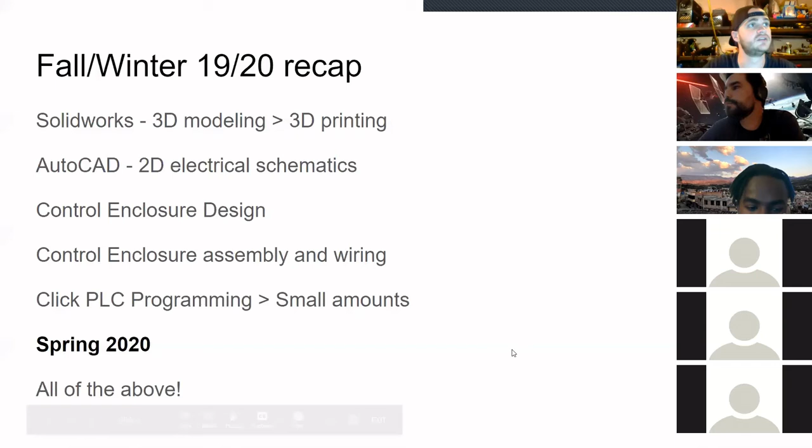So this quarter, what I want to do is go back over some of the things we already covered because we have a lot of new people joining us and there seemed to be a lot of interest in the SolidWorks and AutoCAD even more than the programming side.

So I'll share here the results of the survey. This is a homework assignment on Canvas. So 17 of you guys got to that. That means there's like 5 people who haven't done this yet. So if you're here and you haven't done this yet, please go complete the survey.

But it looks like about half of you are planning to put in as much time as our meetings will take for this quarter, which is fine because we're going to do some collaborative work. I do encourage you to play around with the things we're going to cover on your own time and really try to apply what we go over, explore any things you were unsure about, send me emails. This is going to be a lot more valuable if you put in a little bit of time on your own rather than just coming to these meetings.

Like I said, there was a lot of interest in AutoCAD, so we'll definitely spend some time on that. Almost as much interest in SolidWorks, so that'll be good. Unfortunately, we don't really have access to 3D printers this quarter, unless they change something that I'm not aware of. I don't think that's going to be available until the quarantine is lifted. But we can still go over how to set up 3D prints so that whenever you do get back on campus, you can go print up all the stuff in your library that we create this quarter.

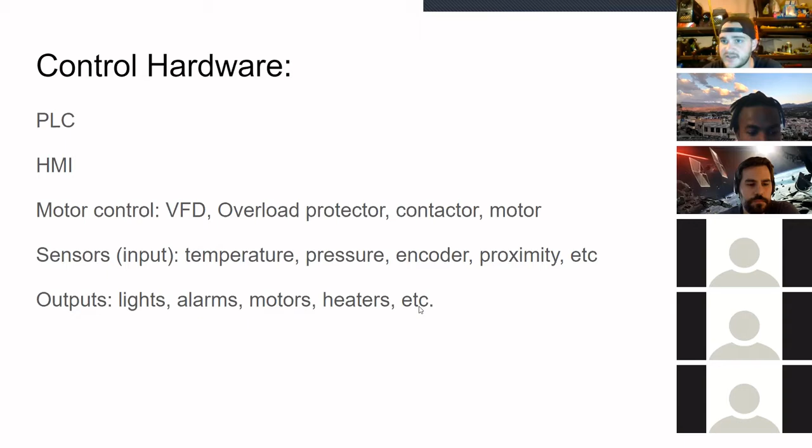You're going to have a bunch of motor control components. You'll have a bunch of sensors that are inputs to the control system, and then you'll have outputs in the forms of lights, alarms, motors, heaters, etc. So we have the first three available to us. I'm not going to hook up a heater in my house because I don't want my landlord to kick me out.

So just an example of what I'm talking about. If you have your air conditioner in your house, you may or may not know how this works, but we're just going to go through it real quick. Your home AC is broken up into different modules. You have your control head, which is the thermostat.

Sorry, we got a lagger here. Hey, Cody.

So you have your controller, you have a user interface, you have sensors, you have a heater, a cooler, and a blower unit. And so in this particular system, the human interface and the controller are one module, right? That's your thermostat. That's where you go and punch in your temperature, and whether you want it to cool or heat and what times you want it to run.

And then you have really one input. When you're talking about an input, you're talking about a sensor input to the controller that is monitoring continuously, right? Not human input. So the one real input we have on most AC systems is a temperature sensor that's installed somewhere in your house. Usually it's actually just on the thermostat, and that's just looking at the temperature of the room. Once that goes below or above a certain threshold, your AC automatically turns on and it kicks on the cooler or heater and the fan.

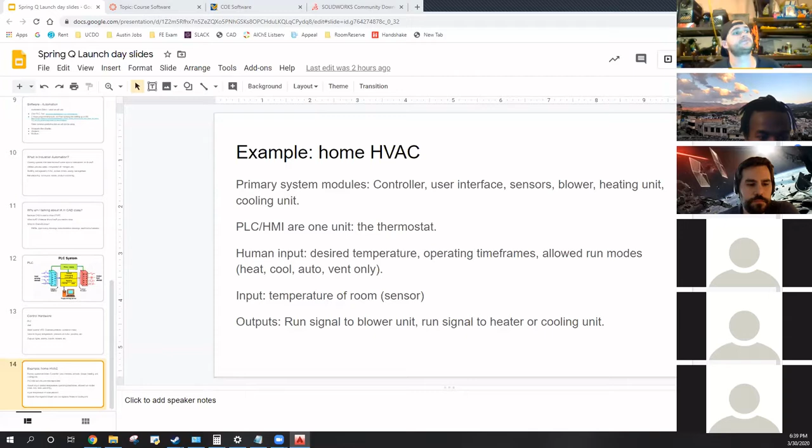Bear with me. By the way, if you are going to install a local copy of AutoCAD, I think the oldest version you can get through that link I have is 2018. If you want to put in some legwork and try to find 2016, 2016 doesn't watermark your drawings with a student watermark, which anything after 2017, when you save the drawing, it's electronically stamped with a student watermark, and you can't remove that ever. So it might behoove you to get a 2016 version if you can.

Does everybody have AutoCAD pulled up? Let me know if you don't. Yep. It's asking for a license.

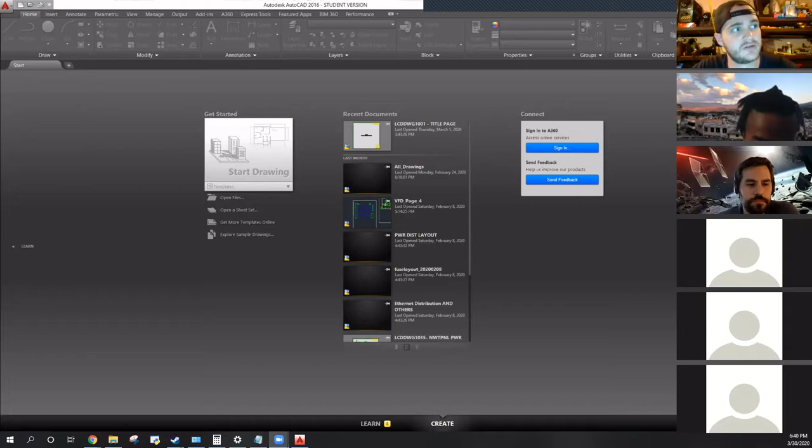Okay, are you remote or local? Local. Okay. Did you just install that today? Yeah. Okay. You should have got an email with the license, but you might want to just go remote for the sake of expediency.

Okay, I'm gonna go ahead and move forward. I'm gonna assume everybody has it fired up. Let me know if you don't and you want me to wait.

So the first thing you do is go in here and hit in the upper left corner, hit the new button, and it'll pop up this to select a template. Just use the default acad.dwt.

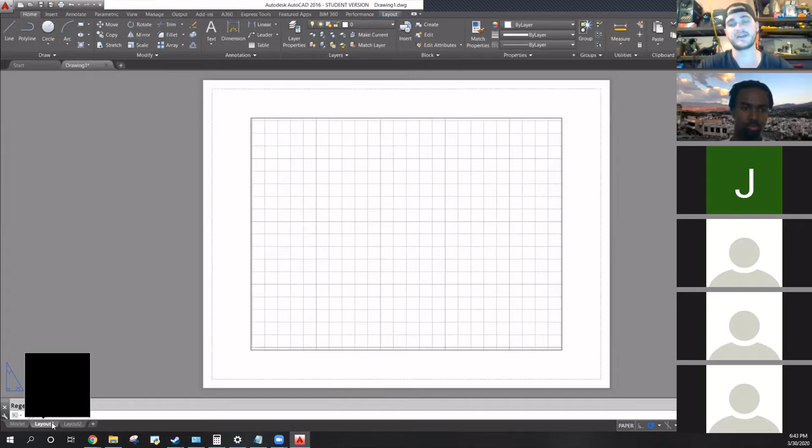Now, there's a couple of layouts here. By default, when you open it up, it'll have like layout 1, layout 2. These are like windows into your model space, right? And you can define these however you want. What it's going to show is a certain slice of content that you tell it to in the model space, so it's not necessarily going to display everything you've drawn in model space. So I'll just give you a quick demonstration of that.

I drew a big circle, but that's not shown in my layout space. So what I did is I reframed my model space to show that circle fully. Now I can zoom this in and out, so I can show more than that circle, or I can show just a small chunk of it.

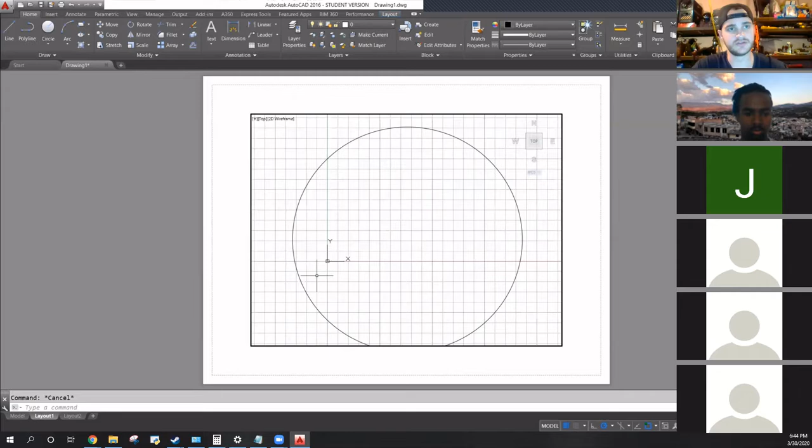So just be aware of that. Whenever you print a drawing to PDF, you're going to do it from this layout space. As we get further into this, you'll see it becomes very important how you define this stuff, how you zoom it, in order to get it to export correctly. For now, we're just going to draw stuff. Don't worry about that, but be aware that you need to always be in model space when you're drawing.

Okay, so some basic commands. When AutoCAD was first created many, many moons ago, pretty much everything was text-based. You would type in the coordinates of where things went, and there was basically no point and click. Over time, it's really evolved to let you use your mouse a lot more and click around and do stuff. You can see there's line and polyline and circle and all this stuff up in the top left-hand corner that you can click on. But for the sake of working quickly in AutoCAD, it's good to memorize some basic commands.

This will come with time as you do more and more drawings. The first one is that to draw a line, all you have to do is hit L and then press enter. So I've now opened the line command, and now all I have to do is click where I want my line to start, drag it over, and click where I want my line to stop.

Now, one of the things about AutoCAD is usually, at least with lines, and I think with a lot of other shapes, it keeps creating them as you click through. You can see everywhere I click, it stops that line and starts another line. So whenever you want to stop drawing lines, just hit escape.

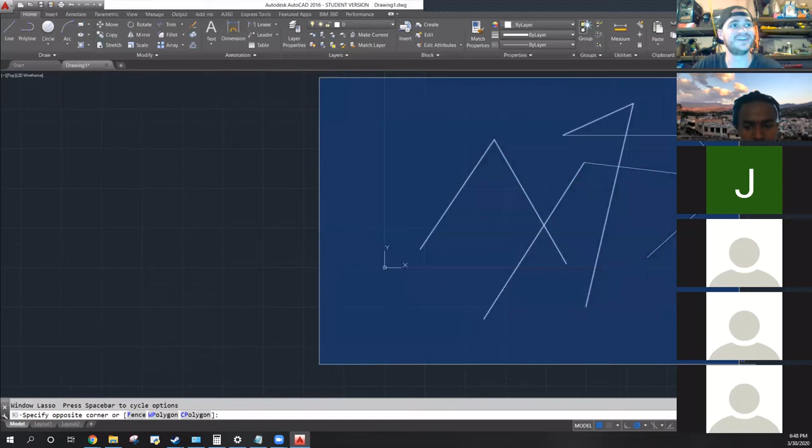I know I'm taking a lot of time on this one little thing, but one piece of feedback I got from previous quarters is that I rushed through things too fast. These are the fundamentals that will make your life good when drawing in AutoCAD, because it's a relatively simple software. But if you don't get these fundamentals down, your life's going to be tough—you'll know exactly what you want to do, feel like you're telling the software to do it, and it won't, which is super annoying. So I'm going to take the time to go through this step by step, slowly, and be super clear. If I'm boring you to death, sorry—we want to make sure we get this right the first time.

So that's lines. Now if you want to draw a box, go up here in the top left and do the same thing—just click and drag. Now if you notice, when I get into a certain geometry, it creates that slanted green line going across. That just means I'm making a square. AutoCAD does a lot of nice things like that for you automatically. So even though you're making a rectangle, you can also make a square if you just follow that green line and click. Okay, so that's a square.

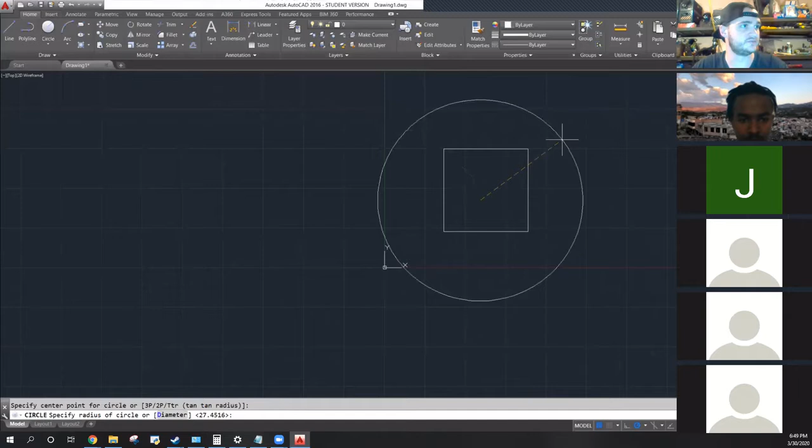Same thing for a circle. And then a polyline is basically just the same as drawing a bunch of lines, kind of—but instead of being separate lines, it's all one single line. That can be useful depending on what you're using it for. Generally speaking, I'd say just use the line tool and make multiple lines, because there are commands to group and ungroup those lines, which I think should work here, maybe.

Okay, I'm going to redo that real quick. So if you make a polyline with multiple line segments—okay, even though this has a bunch of different segments, AutoCAD is treating this as one entity. This is one piece of geometry in AutoCAD. Well, what if I want individual lines in this shape so I can manipulate those lines however I want?

There's a command called explode. What explode does is take any entity like this that has multiple pieces joined into one group, and separate them. So make a shape like that using polyline and then type explode, and you'll see now that these are actually separate entities. You can individually select them, drag them away, and manipulate them individually. Cool.

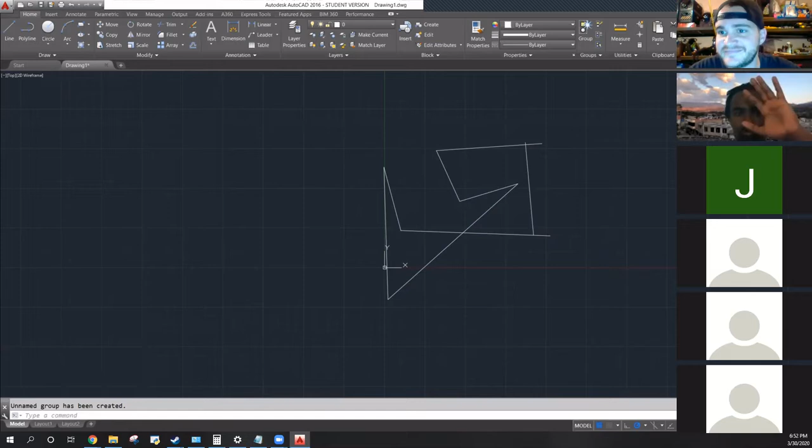Yeah, so I'm trying to explode a box that I created, but it says six objects cannot be exploded. Wondering if—let's try it, I'm gonna make a box. I think it was because I did individual lines to make the blocks. Oh yeah, okay, that's what I was about to go over.

So if I just have a line here, and I select this and try to explode it, that is its smallest entity—it can't be broken into individual pixels. A line is the most basic entity you can have in AutoCAD, so it's not going to let you explode that into smaller constituent items.

More so, I created a box with all the individual lines, then I grouped it, and I thought... Oh, it's the reverse of group, but it's not? It should be, so let's explore that. The next thing I was going to do is show you how to group it—so if you select all these things and type group... did I already do that?

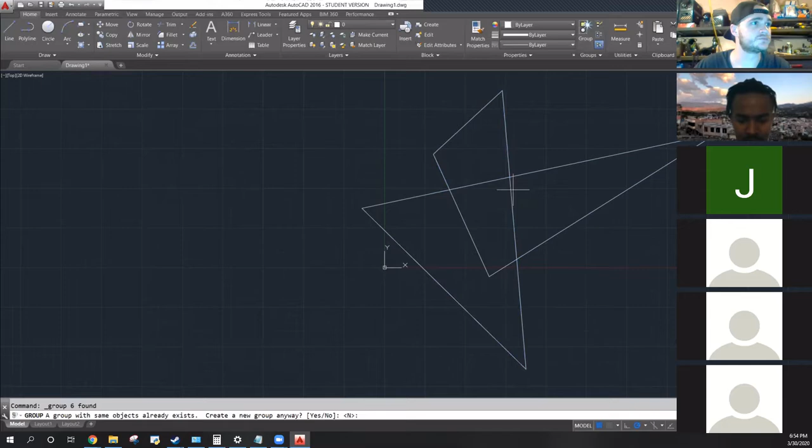Okay, well, I know another way to do this. So if you type in block, it'll come up with this block definition tool. A block is a special kind of object you can create, and this is really good if you're creating a hardware module or something that has a bunch of individual pieces.

You can draw them individually, and then when you create this block, you can name it whatever you want. I'm going to call it polygon. Create it. Now this is one individual item, right? Like it was before when we drew it.

But if you double click on it, you can edit that block specifically in the block editor tool. This is powerful because what you can do is, let's say you have a specific module like a power supply, right?

You create a block for that power supply and save that as a block. You can recreate that power supply by just copying that block in your drawing. Then let's say you made a mistake when drawing it, you can go in, edit that block, and it'll edit every single instance of that block in your drawing. It's kind of like a function block in programming, right? If you have a function that's being called in different software, you can go edit the original source function, and it'll then be changed for all the software that calls it.

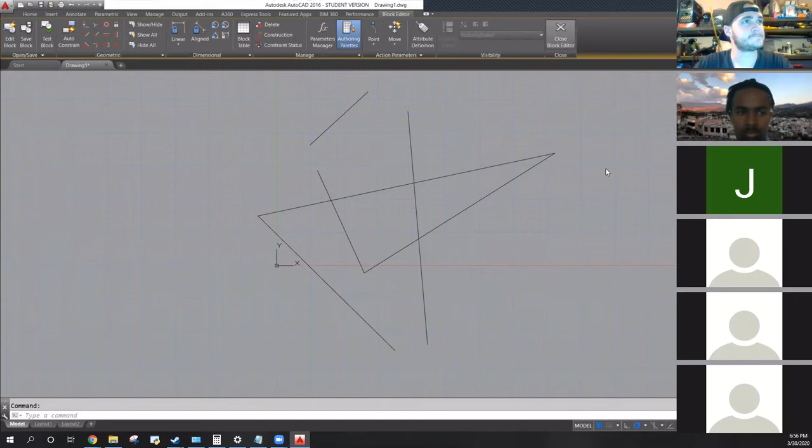So I'm going to save my changes, and now you can see in the main drawing it's all screwed up and it's not a very good polygon anymore. To be honest, I thought group worked that way, but apparently not, so I'm learning along with you guys. It's really weird because I swear I've grouped together a bunch of things before and had it stick together in one shape.

So you can explode a block in the same way you can explode a group, right? Don't worry about what I'm doing right now. Okay. Onward and upward.

So we went over blocks and groups and how to draw different shapes. Now I want to go over some of the more important settings for these drawings, which is down in the bottom right hand corner here.

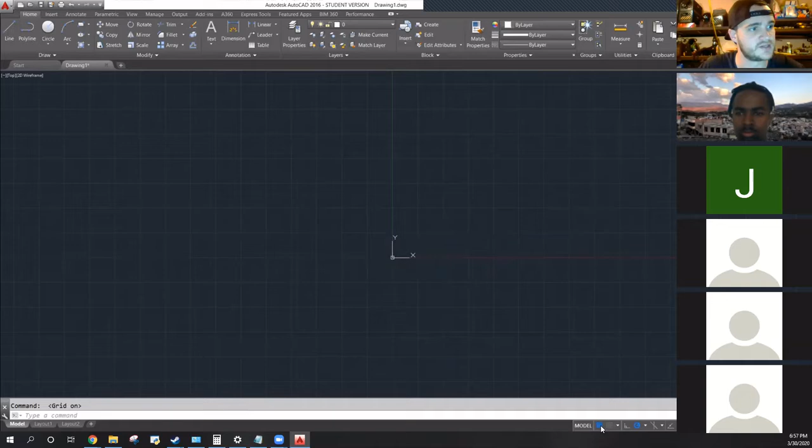The first thing here is displaying the grid. You always want to keep the grid on. It just helps give a sense of scale to your drawing. I guess if you really hate it you can turn it off, but I always use it.

There's another snap mode called grid snap. If you have this on when you draw things, if you look at how my cursor is being moved, it's snapping onto those grid lines and it'll only move to a point in that grid, to an individual node in that matrix. Some drawing standards or companies require you to keep grid snap on at all times.

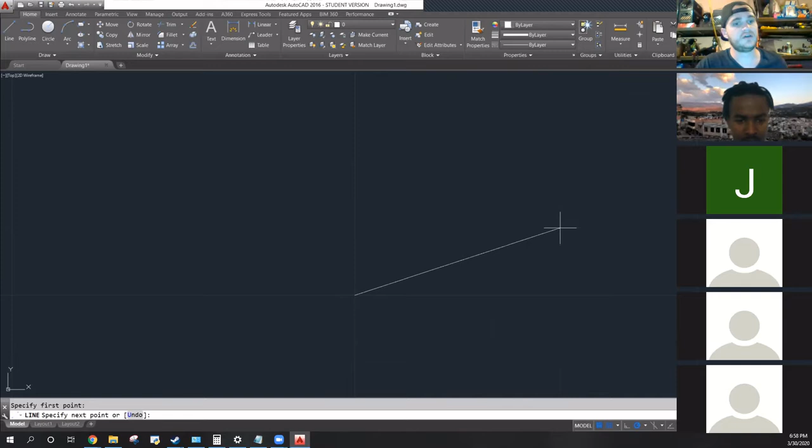There's advantages to that. It's super frustrating to work with sometimes if you're used to drawing without it, but it basically makes everything very square in the geometry. So I almost never use that unless there's a really good reason to, but it is there if you want it.

Zooming back out, restricting cursor orthogonality just means if you have this on, you can only go at 90-degree angles. So if you draw a line, you can literally only go north, south, east, west. You can't go on any other angles, right? Super annoying, I usually leave that off.

The next one in line is restrict cursor to specific angles. This one I usually keep on. You can set it to whatever you want, and you can even customize this. I usually keep it 30-60.

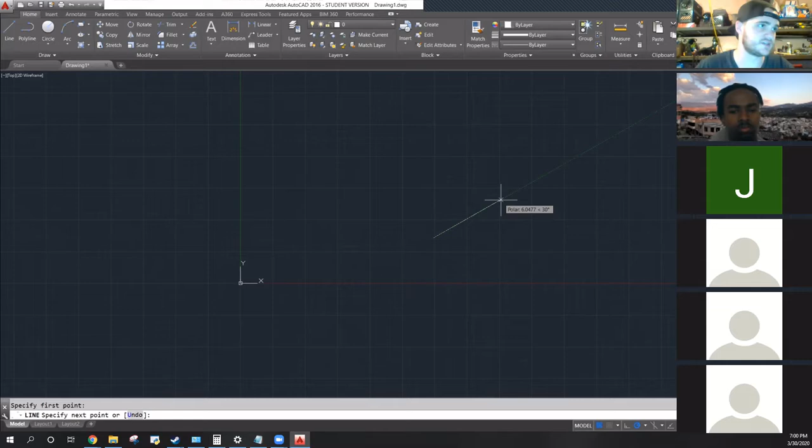So when this is on, it doesn't even lock it, but it'll just give you whatever angle set you selected as you move. You'll see that green line when you get onto one of your angles in your set, and it's just showing you that projection, saying this is 30 degrees or 60 or 90, right? You can see why this would be super useful for certain drawings, so I usually keep that one on.

The next one is isometric. This is actually creating like a virtual 3D drawing. If you follow the lines, you can basically draw in perspective. So if you wanted to draw a box in perspective, this lets you do that.

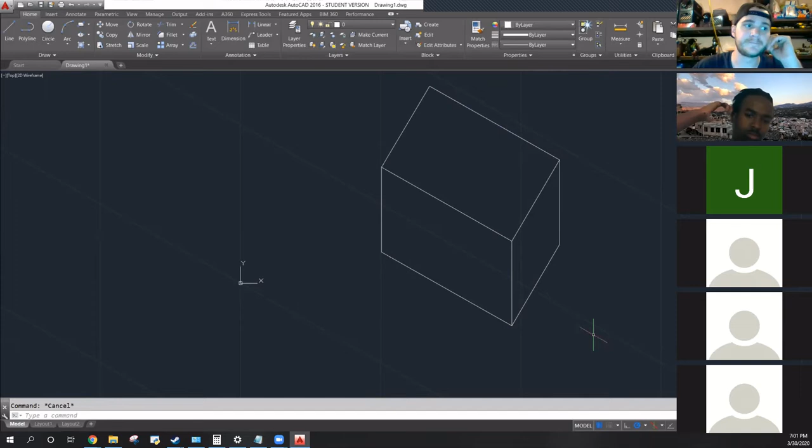So this actually gets used a fair amount for installation drawings. We'll go over this more later, but it's cool that it's there. As you can see, I just drew a box in perspective on this ISO plane. We'll go over that in detail later, but it's a handy way to let you sketch in 2D that looks isometric, like you're in 3D perspective.

The next in line is snapping reference lines. You can keep this or not. It's for object snapping, which we'll go into right now. It can be useful. Object snapping is probably one of the most important things to get set correctly and be aware of when doing drawings in AutoCAD, because it's how you stick things together.

If you click on this drop down in the bottom right, it pops up all these different snap options. By default, I think most of these should be selected. I usually keep the first 8 on at all times, and then tangent and perpendicular are also really useful.

So what these settings do is when you're drawing lines - I'm just going to draw a line, make a triangle. You can see when I bring my mouse down close to the end of this line, it gets this green box around the end of the line. That means it's doing a snap, and that box means it's doing an endpoint snap. So if I click while that green box is showing, it's going to snap the ends of those lines together.

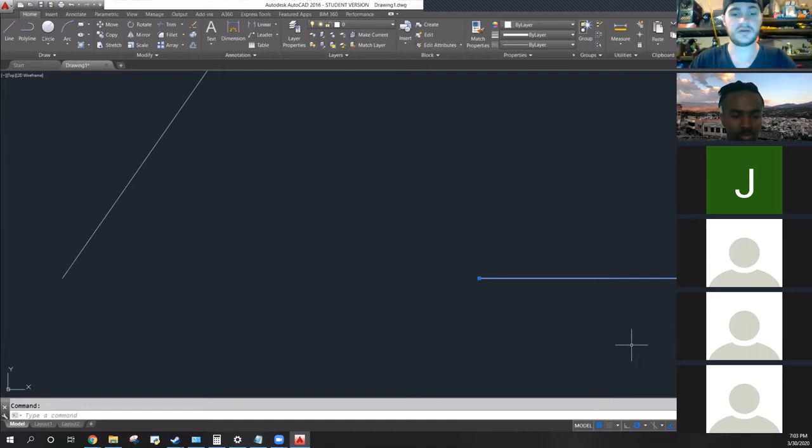It's useful because if you don't have that on and you bring your line, you might think those are touching - they're really close. But if you zoom in, they're actually not. One of the really important things in AutoCAD is having actual true intersections between all your lines and models, because if you don't have that closure, a lot of commands aren't going to work correctly later on. So definitely keep snap on and be aware of what it does.

So that was an endpoint snap. The next one is a midpoint snap. If you have midpoint on and you mouse over near the center of any line, it'll show you a green triangle, meaning it's snapping to that midpoint. Hit that, and you can see it lets you draw the Triforce.

Man, this is even weirder than being in a classroom because there's zero feedback. I don't even know if you guys are at your computers. Whoa, that's so cool - hey, is there a robot talking? Oh that's right, I'm at my computer. You guys programmed a robot already? I'm so proud of you. I'm not even mad, I drew a triangle. I have a mess on my screen. That's good, that means you're learning. The first trick to making omelets is breaking eggs.

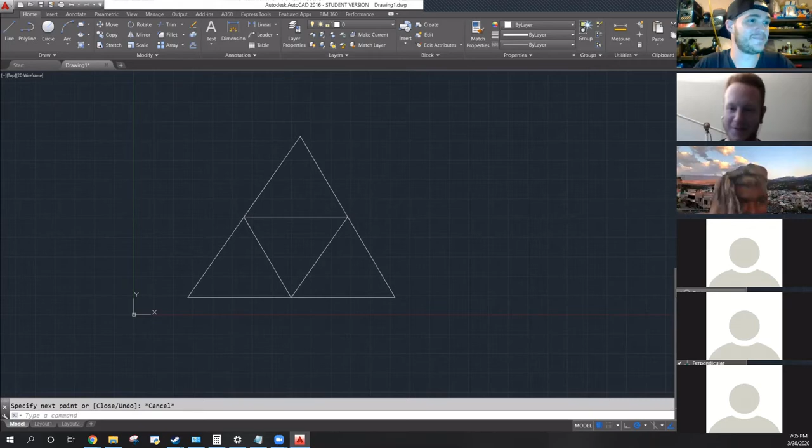Okay, next snap thing is the center point, and I'm not sure if that's going to work on here - yeah, probably not. So to show a center point snap, let's draw a circle. We have a beautiful circle. Press line, now mouse over that circle and go to the center, and it makes a little green circle in the center, meaning we're doing a center point snap.

I think that center is only actually for circles. There's also geometric center, which works for rectangles and other shapes. The way you engage that snap is with any geometrically balanced, symmetric shape in this software - when you mouse over it, you'll see that little white dot in the center. That just means that's the geometric center.

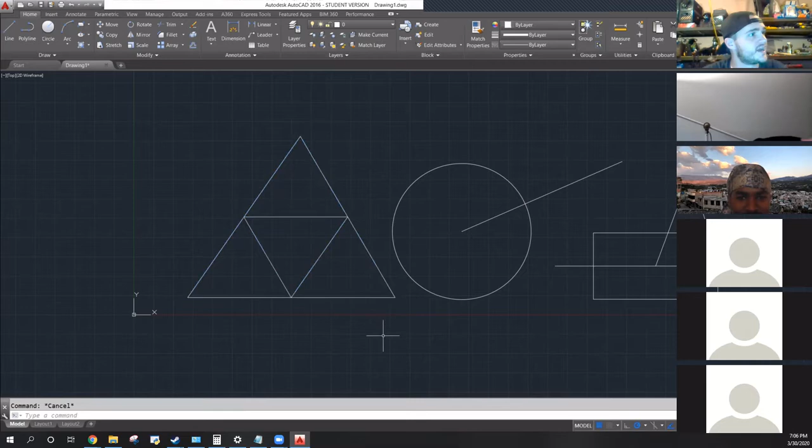If you don't know what that means, ask Dr. White, he can explain in mathematical terms. But that also means our Triforce wasn't geometrically centered, which is unfortunate, but I think I also knew that was going to happen - so that's super sad. Let's fix that. Go ahead and delete your Triforce and let's start it over.

Draw the bottom line on the plane. Draw this next one at a 120 degree or 60 degree angle, depending on how you want to look at that, and then draw another line starting from that other bottom side, also on that 60 degrees. Cool, so now that kind of looks like a teepee, right?

And we want to get rid of these little extra things. So what we're going to do is select those lines. Does everybody have this? I'm going to assume that's a yes. So if you select those two lines and then type trim and hit enter, and then mouse over these lines and click, it'll delete those little doohickeys that are sticking past.

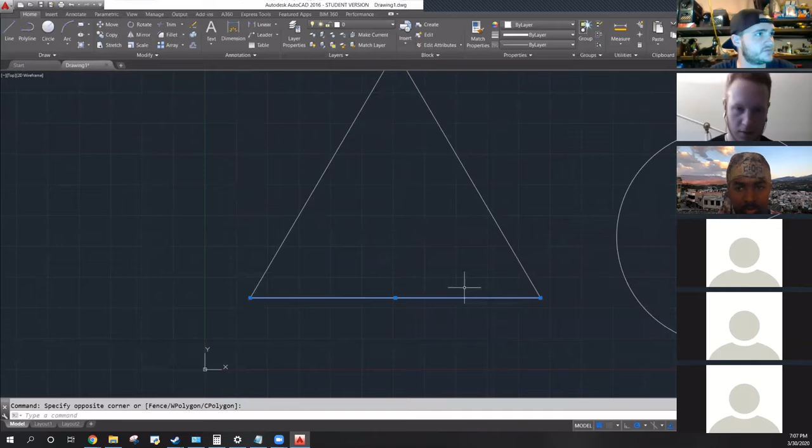This is kind of useful because I just realized something. No wait, that should be symmetric. So that trim command just lets you delete things that are sticking off.

So if I wanted to get rid of the thing sticking out here, I could do the same thing. The cool thing about trim is you select something that's your defining geometry - in this case, that's the circle. That's my boundary. Now with trim, I can delete this inside line or this outside line.

It's whatever's on one side or the other of that defining geometry you just selected. So if I wanted a weird line sticking off of a circle, pointing towards the origin but not actually going through it, I can draw this line from the center, draw that, and then delete it, trim the inside. Now I have this weird little unicorn sticking off of my circle that I have no good reference geometry for.

Same thing here. If I select this triangle, go trim, I can delete that line in the center. That's a super useful command because sometimes it's hard to get things drawn perfectly from the get-go, or you might want to make something that looks super weird like this, and manually drawing these intersection lines might be a total hassle.

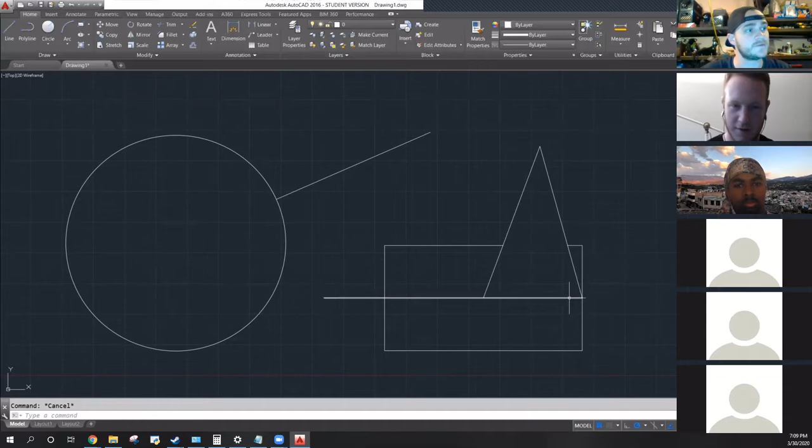Useful trick to have in the book.

Okay, so now I wonder if that object snap is going to work. Okay, so the center point snap is going to work. I think this is what group is for actually. So select that triangle and group it. And now... it still doesn't work. Okay. Tried it with block, doesn't work either. Block doesn't work either. It should - I've done this before.

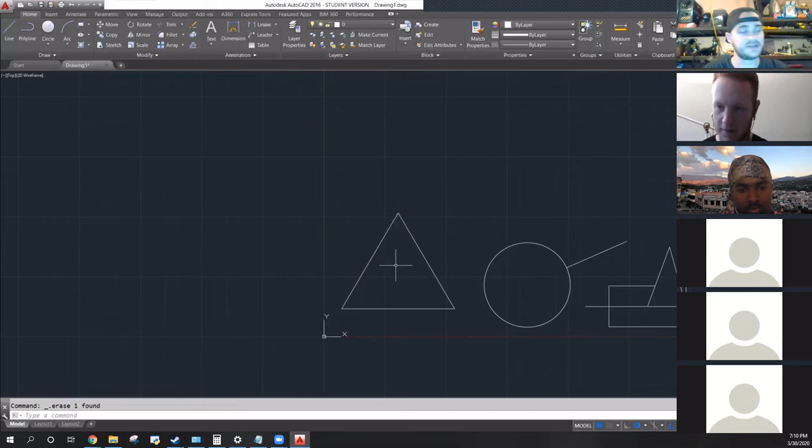Well, the nice thing about AutoCAD is if you can't get it to work the fancy way, there's always a way to do it manually. So what you can do is draw a center point arc from here and draw it through the vertex of the opposing part of the triangle, and then do that again over here, and then again over here. And now we have our geometric center of this thing right here.

Actually, now that I'm thinking about this, I don't know, we need to ask a math guy - it might be that the software just doesn't calculate a geometric center. But now I have that center point that I can draw lines from. So if I want to get this weird line, I can get that. And then if I don't want these reference lines here anymore, I can delete them.

Now this is a good opportunity to start talking about layer control. Basically what AutoCAD does is let you define layers in your drawing. You can think of this like an old school overhead projector with clear plastic sheets you could draw on with marker and then project. Imagine a clear sheet you're drawing on with marker - you can keep laying these sheets on top of each other, layer by layer, and in the end you'll have this big stack of sheets with all these things drawn on them. But looking straight down, it looks like just one drawing on the sheet. By default, there's only one layer, the 0 layer, in this drawing.

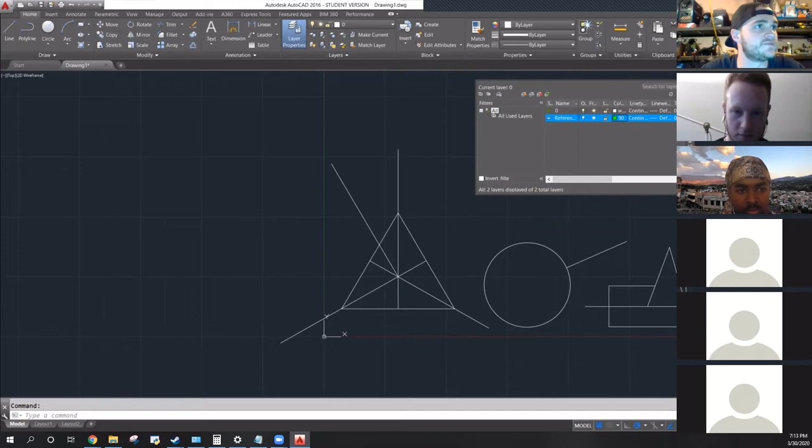Okay, so that's defined now. That's another layer we have. So now we can select these entities, go to the layer dropdown, and hit reference layer. And it made them green. So it does a lot more than just letting you turn things different colors.

You can set all kinds of layer properties, like a line style - get rid of that, by layer - and then you can set a weight. These actually aren't going to show up in the drawing, but how do I make this display?

That is one of the super annoying things about AutoCAD - there's like 2 billion settings. One of the things I haven't figured out very well is how to get your layer settings to display really well in the model space.

But your layer line weights, you need to be really careful with this because they all show the same weight on this drawing here, but when you go to print them to PDF, right now this is 2 millimeter, that's just going to show up as like a super thick bar and it's going to make your drawing unreadable. So usually leave this as default unless you want to make it super thick for some reason, but be aware of that.

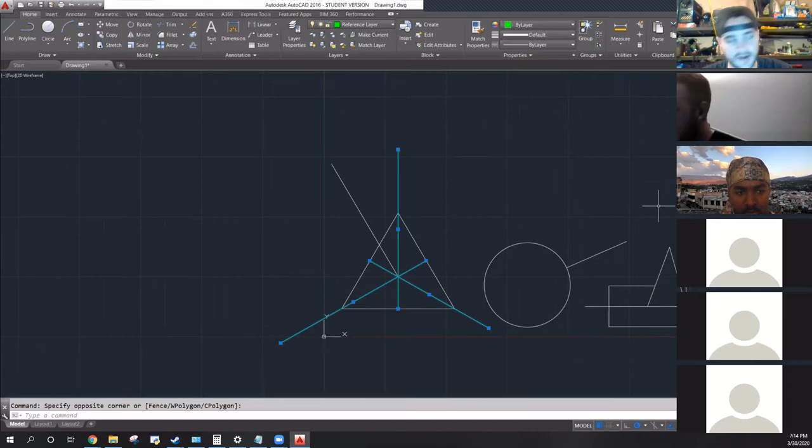Okay, so now I have this reference layer. Let's say I'm done using that as reference geometry - I can turn that layer off and those lines just disappear. So the whole point of what I'm showing you is, yeah, that was some extra work to create another layer and go in and hide those lines. But if you're doing a really complicated drawing that relies on some underlying geometry that isn't part of your final product, but you need it to draw everything correctly in reference, you can create a reference layer.

And then at the end, when you're done with your drawings, you just hide that and all of a sudden it disappears and it doesn't show up on any PDF exports. But if you want to bring it back to make some changes, all you do is go in and turn that layer on. There you go, and it's back.

So layer control gets super important. If you're doing an electrical schematic, you could do a separate layer for every type of power you had in your panel - so if you have 120 volts, if you have 24 volts, you can make those on separate layers. It helps because you can set line properties for color and make them dashed and stuff, and you can also just hide everything that's not 24 volts. So if you're trying to trace a specific circuit, it's helpful because you can turn layers on and off through that layer control.

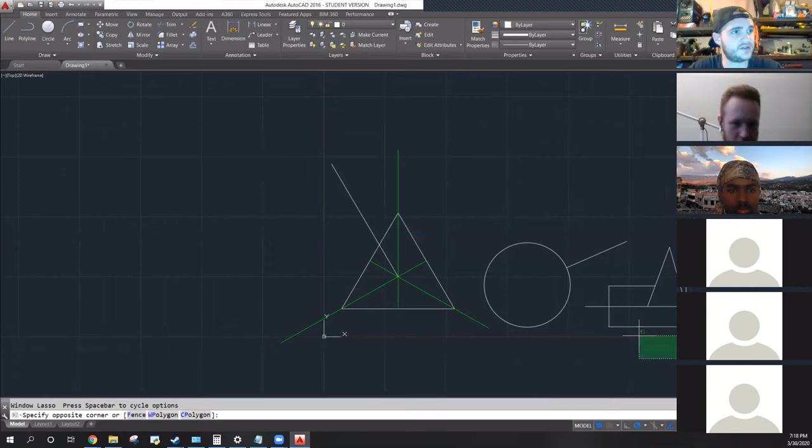So I think we've covered enough that now, in the time remaining, we can get rid of all this Frankenstein geometry and do what I said we were going to do from the beginning - draw a schematic for an HVAC.

So where do you guys think we should start? Thermostat. Perfect.

One of the things you're going to find in these, especially in electrical schematics, is that we're not drawing things to scale. A lot of hardware modules will look somewhat like they do in real life, but a lot of times you can just draw a box and that's fine. So this is going to be our thermostat - we can just draw a box and then you can put a little bit of text in there.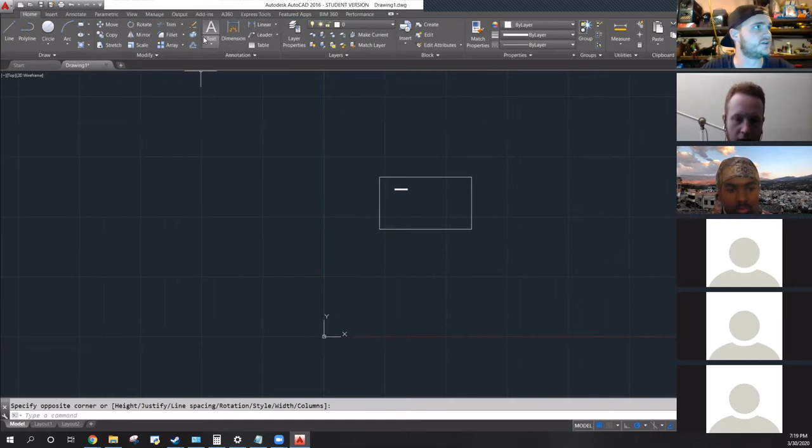So if you see, there's a little text option here in the bar. I'm going to zoom in. You can change your text properties. If you double click it, you can go in here and change the size.

No, this is one of the other things that I'm probably doing wrong. But text is always a pain to manage. So you can either do that or you can just shrink your box down. Either one is fine because all these drawings scale. But now you have a box.

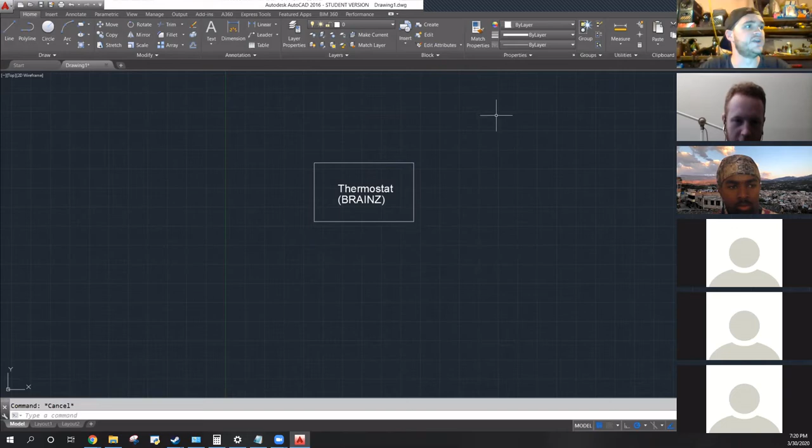Hopefully you have it labeled. Yep. Sweet, cool, I'm gonna assume that's a yep. My text ended up perpendicular, like sideways. That's super dope, you should probably figure out why. You might have tagged it to the corners or something. I don't know, let me see if I can recreate that. I'm not sure.

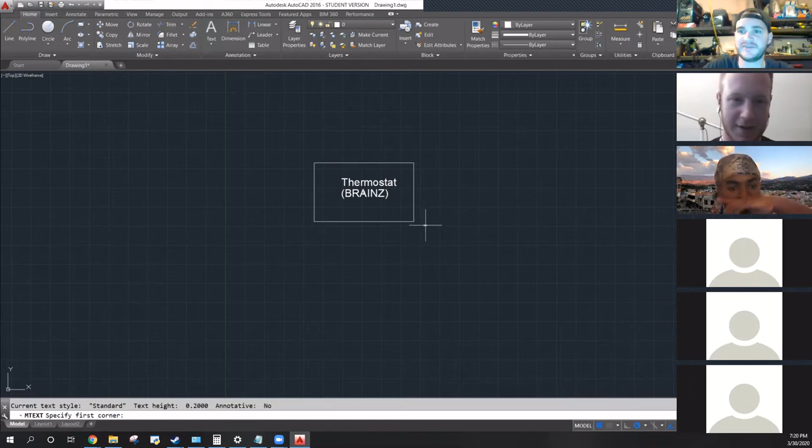Nope. I don't know, I've never done that before. I'll try doing it again. Sweet. Congratulations, you've passed me up. You know more than I do, I'm a natural AutoCAD trailblazer. Yeah, yeah, I don't know.

Maybe close AutoCAD and reopen it. I don't know how you deleted it, so I don't know how to get it back. Oh actually, yeah, same, yeah. I don't know man, that's a new one.

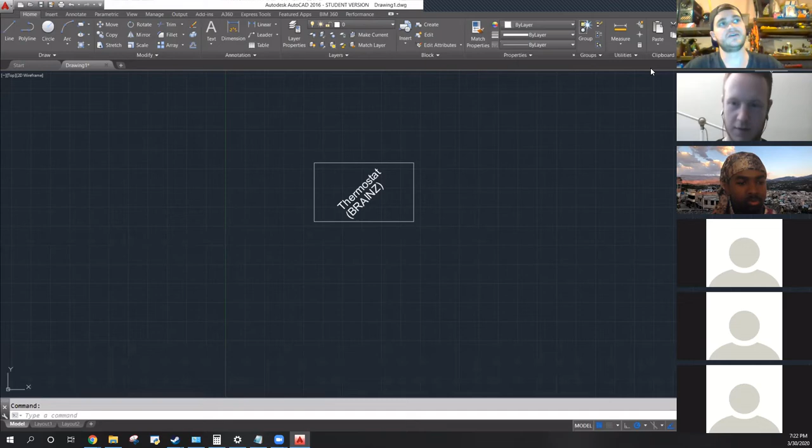You will find that you're going to get a lot of strange errors in AutoCAD. My advice would be start by restarting AutoCAD, like save your file and then reboot or restart it. I mean, it's just like any other program where you can customize your tabs and your view panels, so you may have just wiped all that out. I'm not sure, anyway, okay.

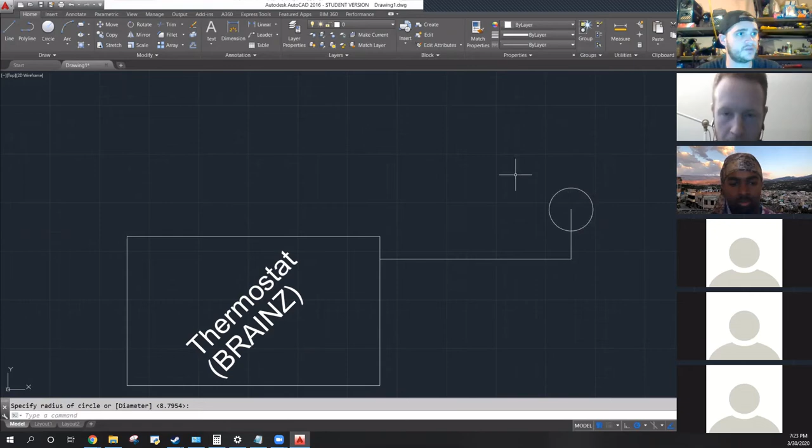So we got our brains. So now let's draw an input. I'm actually going to turn that snap off because I just want it to be right here. I'm just going to draw a line and then another line. And then I'm going to turn snap back on. I'm going to draw a little circle here. And then I'm going to draw a little rectangle here, so I'm going to snap the rectangle on.

You guys will see where I'm going with this in a minute. Okay, so I want it to look something like this. Now I'm drawing this freehand, I'm not drawing it to specific dimensions, so it's okay if it doesn't look exactly like this, if your dimensions are a little different. But in general, you want a circle with a rectangle coming out of it like this.

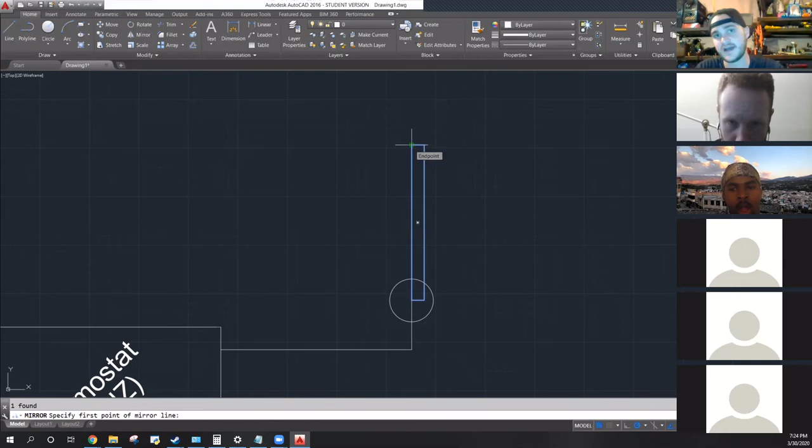Everybody good? So select that rectangle and then type mirror, and we're going to mirror this object. Sorry, I can't talk and type at the same time. So what mirror does is you select an entity and then tell it the line that it's going to mirror on, and it'll copy that. It'll make a mirrored copy of that entity across the line you define.

So I selected this, I typed mirror. Now I'm going to grab this corner and go down to this corner. And then when you click for the second time, it's going to show in the bottom left, it says erase source objects, and we're going to say no. So we're going to keep those.

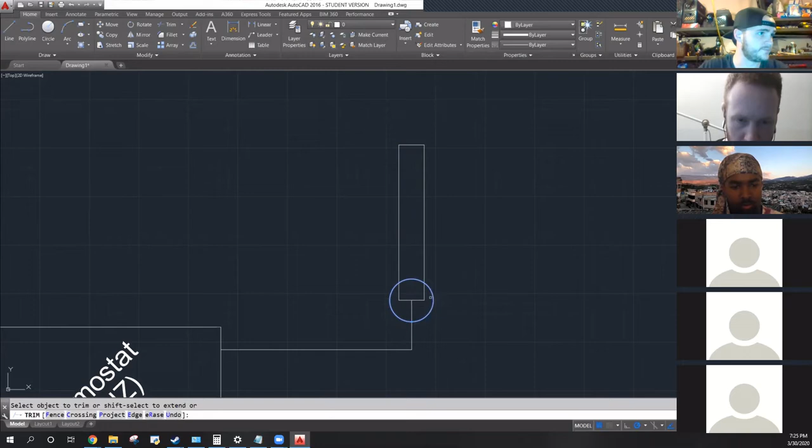So now I'm going to go in and use trim and get rid of that and that, and not that. And I'm going to deselect, and then select the circle, and trim, get rid of that and that and that. And then I'm going to select all of them, hit trim again, get rid of that. And now we have a thermometer.

So if you want to make this super fancy, you can go in, again turn object snap off, and then just draw in some lines for the gradation marks. Now you see I have sawtooth lines, which looks like garbage. That's fine, because I can just go in and select all these diagonal lines. I swear I can select them, I swear I know what I'm doing.

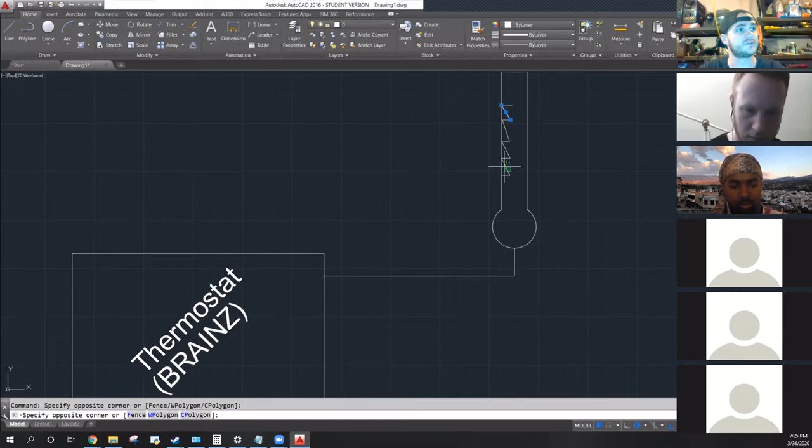So if you hold shift, it lets you deselect stuff but not select stuff. That's a weird ism in AutoCAD. So if you're multi-selecting, you can just click through and select things, and if you want to deselect, you hold shift and click on the line again. It's a weird little ism, but useful to know.

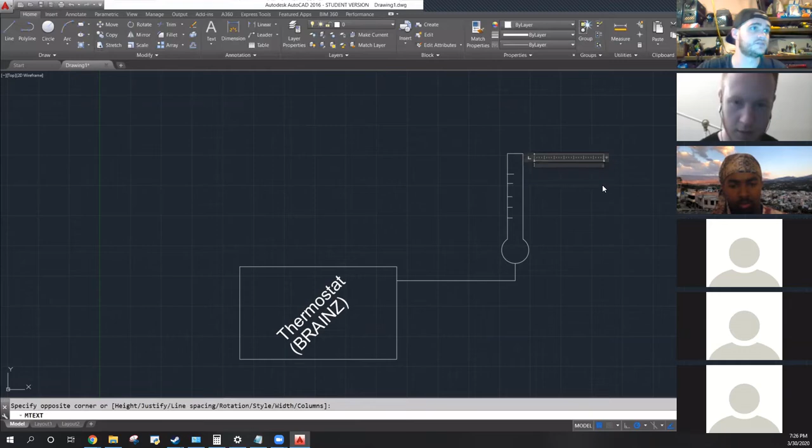So now I have little gradiated lines. We can label this if we want - call it temperature probe. And then again, we probably want to resize that text so it's more legible, maybe not that big. Cool.

So now I've got a thermostat with a temperature input. What else should I draw on here? A fan. Okay, so I'm going to draw - again, I'm just going to draw a line, go out, and go down for this one.

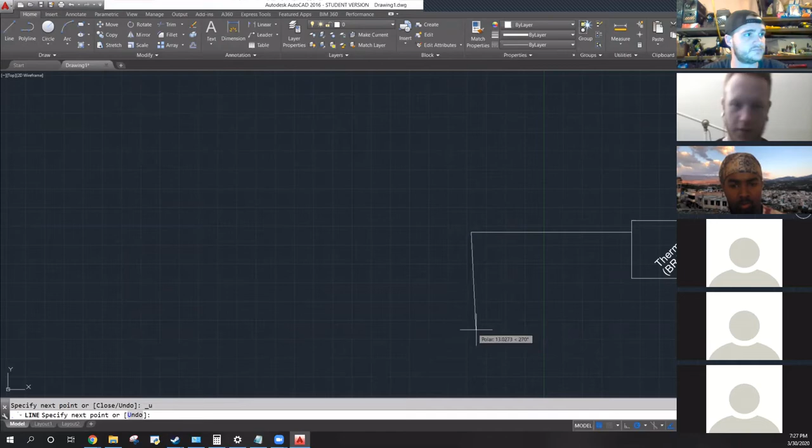Hey John, I was wondering if there's standardized symbols for this stuff. Yeah, there is. That's one of the things I'm working on, getting a P&ID library. There's ISA standard symbols, and then there'll be company standard symbols. I'm working on getting all those, don't currently have them available. Plus this is a good exercise to draw things by hand. But if you're doing a schematic or a P&ID, you definitely want to use a standard library instead of recreating them by hand, because anybody looking at your drawings can reference the page that lists what those symbols are, so they don't have to guess like 'oh that kind of looks like a fan with a heater on it, maybe they put a VFD on there and that looks like a mouse, I don't know what that means.' Great question.

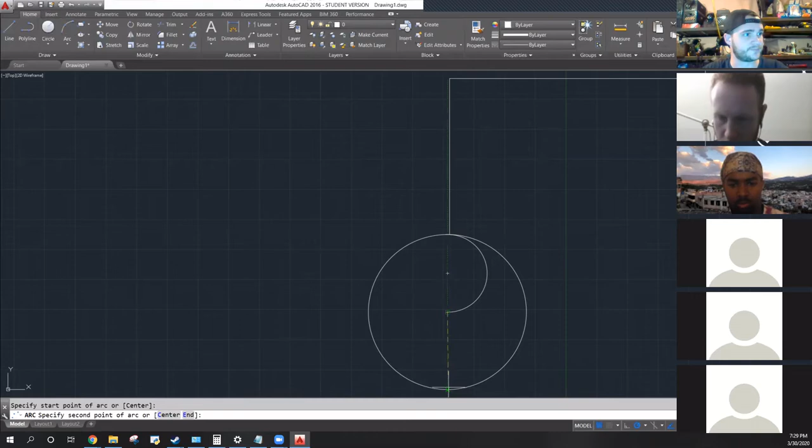Okay, so let's go to the end of that and go down a little bit and draw a circle. And then let's draw an arc. So this is going to be our representation of a fan, just using an arc. Man, that's not working at all.

Copy and rotate tool, maybe? Yeah, you could definitely do that too. Good call.

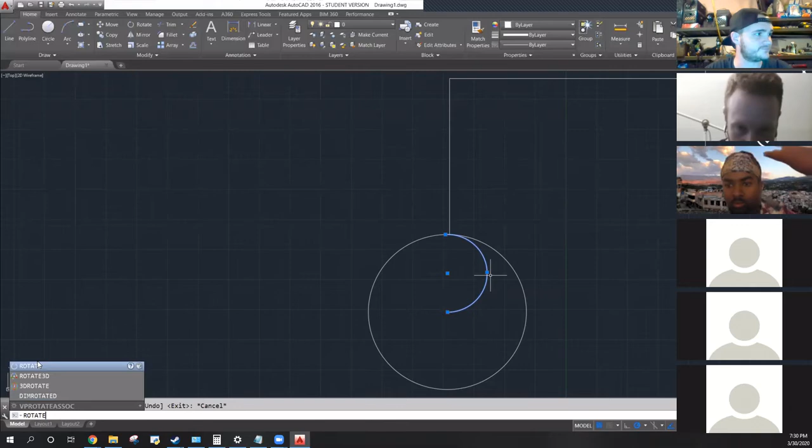So what you can do is select this and go copy, then select the point you want to copy and where you want it to go. Now I just copied that on top of itself, but that's okay. So now I'll select it and type rotate, and it'll freeze. Then I'll specify the base point and type 90, and that rotated that object 90 degrees.

So I'm going to do that again two more times. Copy, base point, copy to there, and then copy to there again. So there's now three entities all layered on top of each other right here. So go rotate - 180. Oh whoops, forgot to specify the base point. Rotate, select your base point, so I'm going to go 90 again, and then one more time.

You guys are probably already done, huh?

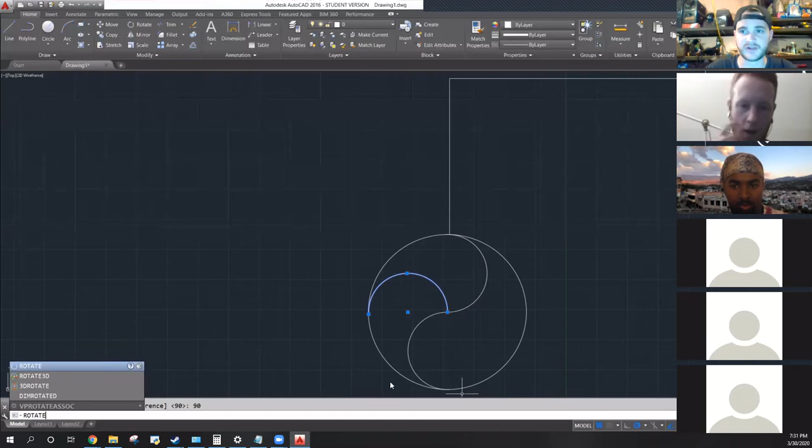And did you stick the circle on the end of the line? Did you snap it or freehand it? I kind of did it freehand. So what I did is I went circle, snapped on the end, and then dragged it down straight down to wherever I wanted. Oh, so you built it on the end of the line and then just moved the whole circle down? No, I went down and selected that, and when you click at the start of your circle, go up and drag back to the top of the line. Oh right, so basically when you went down from the line, you're setting your radius and then dragging back up to the line and locking it in place.

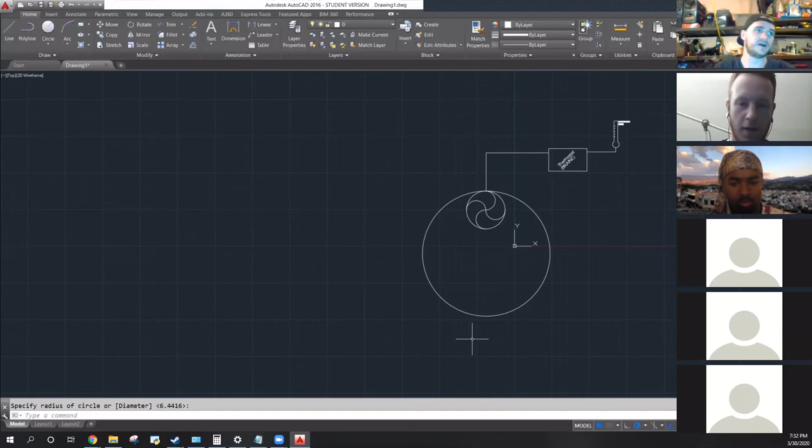Oh gotcha. So you could also just make the center on the line and then trim out - make your line extra long and then trim out the line. There's a million ways to skin the cat in AutoCAD. So I encourage you to experiment and find faster ways than me, because I'm probably pretty slow.

Okay, so the other thing I can do is rather than recreating and resizing my text, I can just grab a box and literally hit Control-C, Control-V, and copy that text box. That way I can just go in and write in whatever I want.

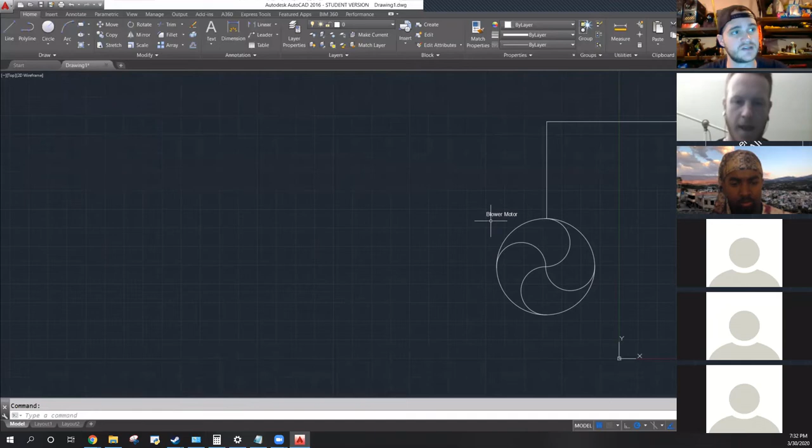Instead of recreating the text box from scratch every time, I strongly encourage you to use the copy command rather than just copy pasting things. But copy paste is an option in AutoCAD and it works fine for text boxes.

For something more complicated, you'd want to use copy and pick your defined reference point, then move it over to wherever you want it to go and snap it into place. What copy is doing is saying, I'm going to copy this whole thing, and wherever I click on that thing is my base reference point. So I could pick this point as my base reference point, and when I copy, that's what I'll snap onto some other geometry. It lets you snap using whatever object snap options you have on.

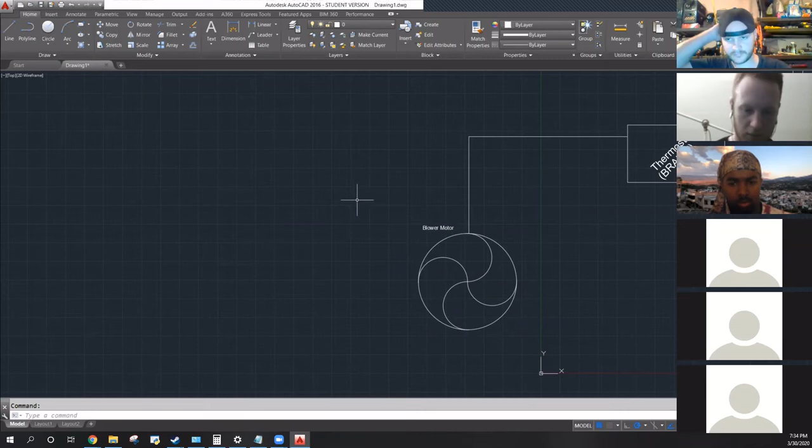Control-Z works great in AutoCAD, so it's super useful if you want to just get rid of that stuff. Okay, so we've got a blower motor. What else do we need? Heater, yep, heater and cooler.

This is one of those instances where it might be good to draw this a little bit more representative of how the mechanical system is configured, not just as an electrical schematic. So we'll draw two rectangles here and label them.

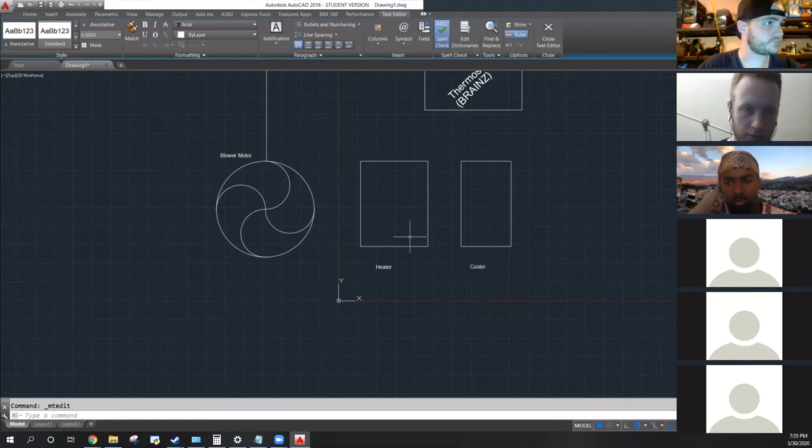Let's grab a couple text labels, and put those below, not above. We'll call this one heater, and call this one cooler.

For the heater, we'll go line, jaggy line, line, arrow for heating up. And for the cooler, we'll go line, jaggy line, pointed down. Boom, boom. So now you have a heater and a cooler.

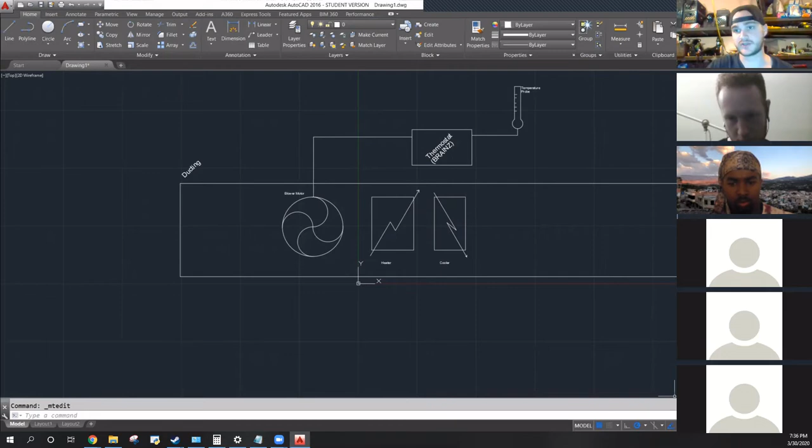To top it all off, we're going to show another big rectangle that I didn't put in the right spot, so we'll move that around like that, and grab a big label here. We'll call that ducting. So what we're doing is showing the control scheme, but also the physical layout, like this big AC duct with a blower in it, and then a heater and a cooler. This isn't exactly how AC systems work, especially not in your house, but it's close enough.

You get the idea - now you're showing not only your control connections, but also a bit of mechanical layout, which is helpful. So now we need to show, okay, I need a control line from here, and another control line from here. Cool, okay, so those are my wires. So I need one more thing. Anybody?

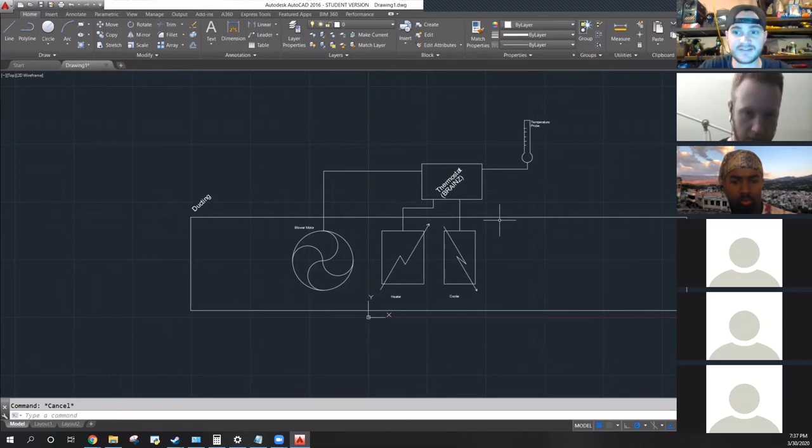An interface? Yes, a human machine interface. For your thermostat, that's actually just on the module itself - the temperature probe, the controller part, and the actual human interface are all in one module, and that's your thermostat on the wall. But that's okay, we'll just show that as a separate box, and we'll call it touchscreen.

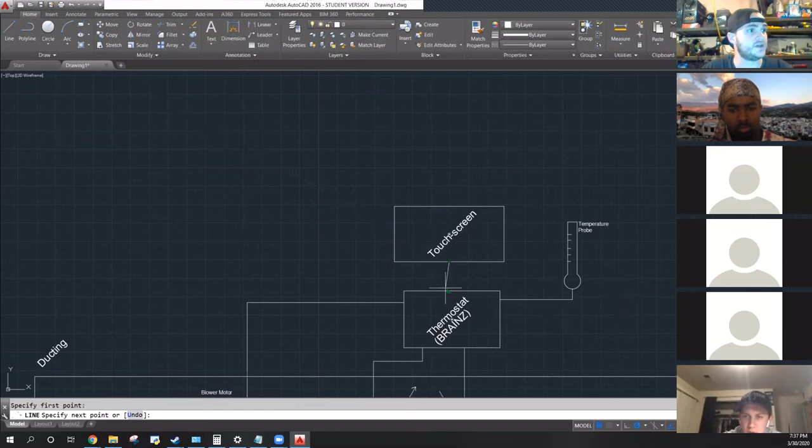There's that, okay, I'll draw a line. And now I'm going to put a note: see drop out menu.

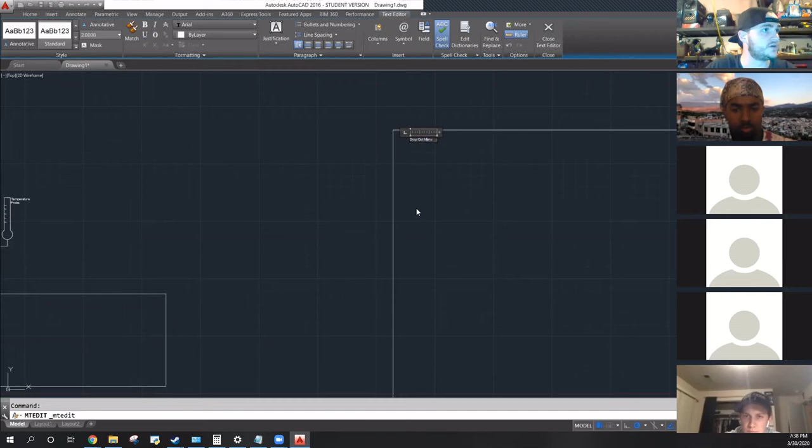Okay, and now over here we can create a drop out menu. This isn't probably the right name for it, but it's something you'll see come with a lot of hardware modules that are configurable, where they'll have a menu tree - here's main menu, and below that you have 1 app, 2 mode, 3 timer.

Okay, and so then we'll have a little arrow - oh crap, I have snap on, turn snap off - so then we'll have a little arrow to another set of things.

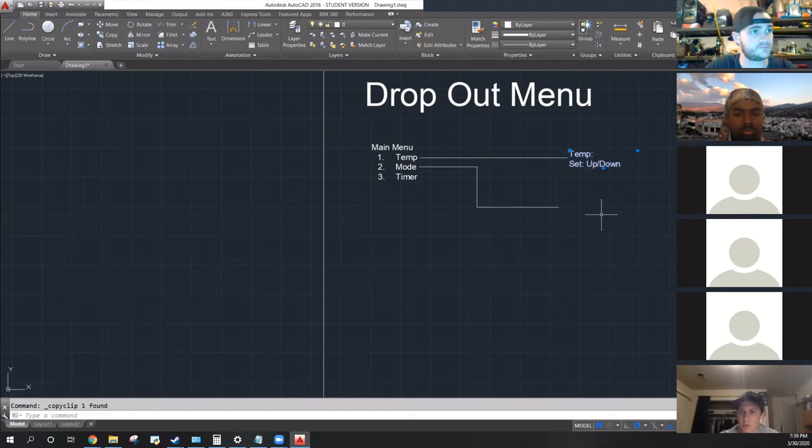All right, get another line. For mode, our modes could be - oh sorry, that's not what I was going to do - so we can do heat, cool, fan, off.

And then for our last one, timer, go down, grab that again, go timer, and let's say continuous, AM, PM, user defined.

Okay, and then off user defined, we're going to have - grab that - start time, stop time.

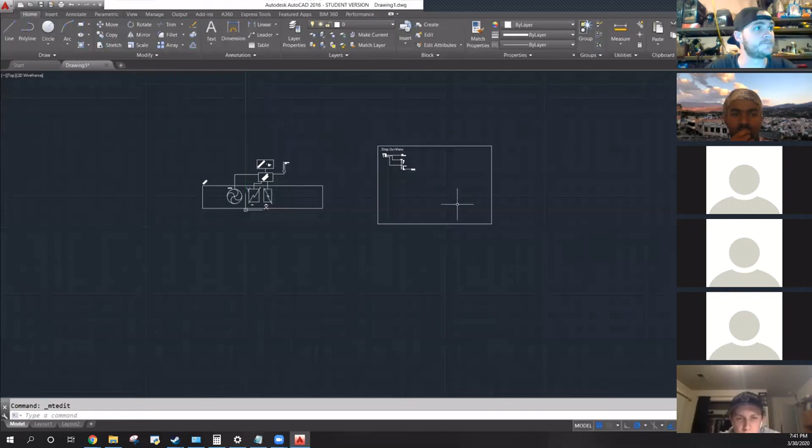This is maybe a little overkill for what we're doing, but this is an example of something you might want to include on your drawing for this system.

All I'm showing is like on that little touch screen on the thermostat, you might have a few options, and each one of those options might have a sub menu that it navigates you to. So that's all you're showing here is how that controller looks when the person is interfacing with it.

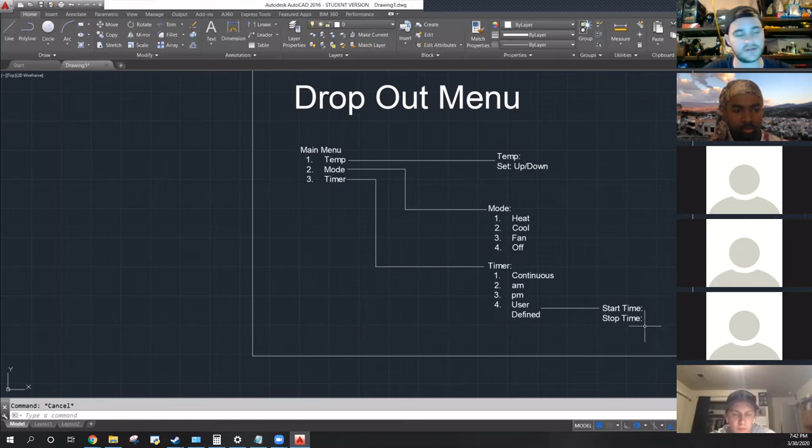And then you could have additional details like what the acceptable temperature setting ranges are, what these operation modes do, and maybe some details on how to use or define the timer. It's just a little fun add-on I decided to do here.

You could clean this up and make it look better, but it looks kind of professional already just by doing it in AutoCAD. Whereas if you were to do this in Microsoft Word, it might not be very easy to get this kind of layout. I know there's stuff out there like Visio that might be easier to get this kind of layout, but I'm just showing you that you can pretty quickly create this kind of stuff in AutoCAD.

My hope is that you guys get super slick in this and start using it for classes like 158, where you have to make diagrams and schematics as part of your assignments. And then maybe even for senior design. I have a feeling I'm going to wind up drawing a lot of our stuff in AutoCAD rather than Aspen.

So okay, cool, so now I have my system drawn out here. Let's do some coloring.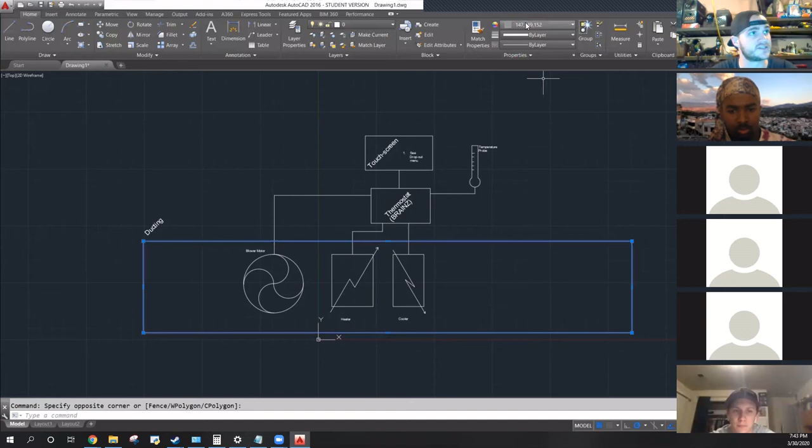So change this stuff to by block. Select the ducting, and I want to make that silver or gray. And then let's go in here and select all the control wiring and make that green. And then because this has to do with temperature, let's make the thermometer be yellow.

Oop, but I grabbed the text, which looks like crap, so change the text back to white. Okay, and then let's make the cooler blue. Let's make the heater red. And then I think white's good for the blower.

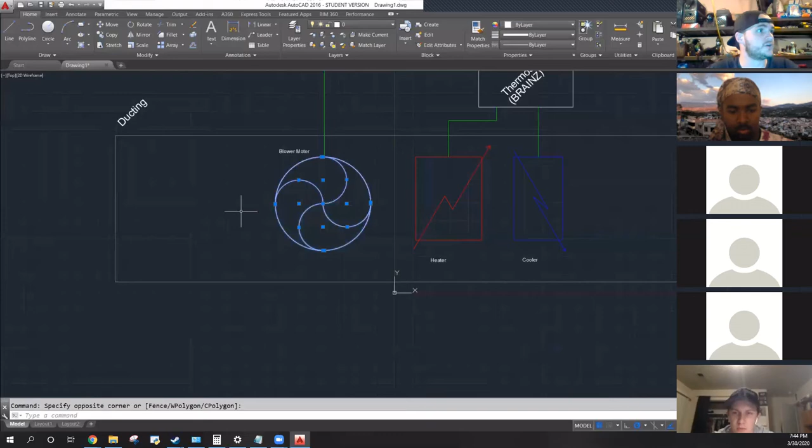So now we have a little bit more color detail on there. It's a little bit more obvious what things are. I have zero artistic talent, this doesn't look the greatest, but I'm sure a few of you are more creative than I am, and with a little bit of practice you can get this kind of thing and make it look pretty slick.

So that's a basic automated system and a basic schematic with a little bit of mechanical detail. And we knocked that out in like, what, 45 minutes, along with a few teaching moments. So I'm guessing with a little bit of practice, you guys could probably draw this out in like 15 minutes or so.

So we've got like 15 minutes left. I don't think I'm going to dive into anything else more complicated, but let's take this moment to discuss and answer any questions you guys might have about how this class is going to go. Don't everybody speak up at once.

So does this just mean I was crystal clear and you guys know exactly what we're doing? Yeah, nobody has any... What's up, can you see the chat as you teach? Yeah. Oh okay good, I was just wondering. Yeah I can now, I didn't have that up at first, so that's why I didn't see your question. You're good. Have y'all youngsters used twitch.tv? Of course, yeah.

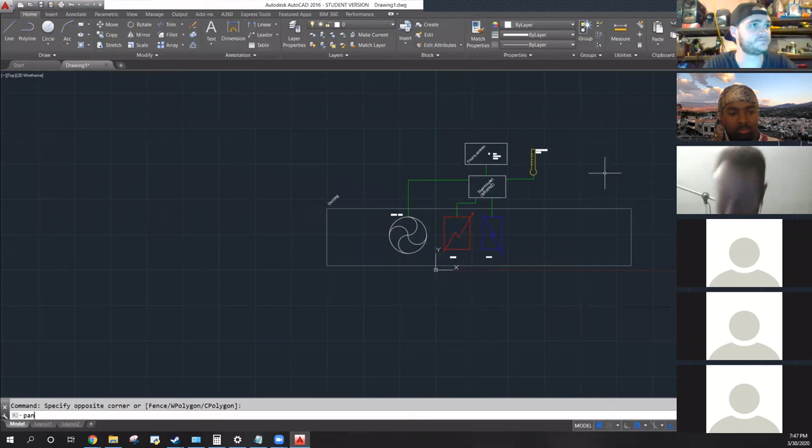There you go. Or if you just click in your roller, you can just move it manually and it'll make a fist and grab whatever section you want to go to. Whoa, today I learned. It doesn't do that when I try it. Do you have a mouse scroll wheel? Yeah, that works for me, the little scrolly wheelie thing. It's working for me, never mind, I was doing it wrong. I have a super fancy mouse though. Wow, it's from the aliens. Okay.

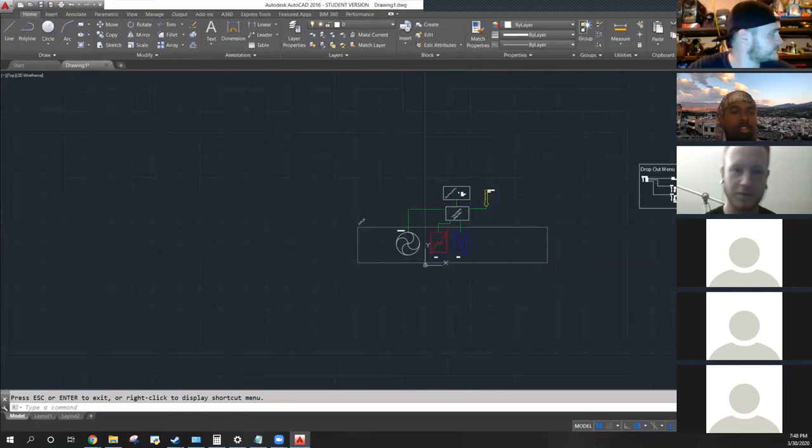So as far as timing, what we cover and when, do you guys have any input? Do you want to keep doing AutoCAD for a couple of weeks, or do you want to go straight into controller programming and jump around? I think starting in AutoCAD would be sick. Yeah, stay in AutoCAD for a little bit, like a week or so at least. Okay, that's fine.

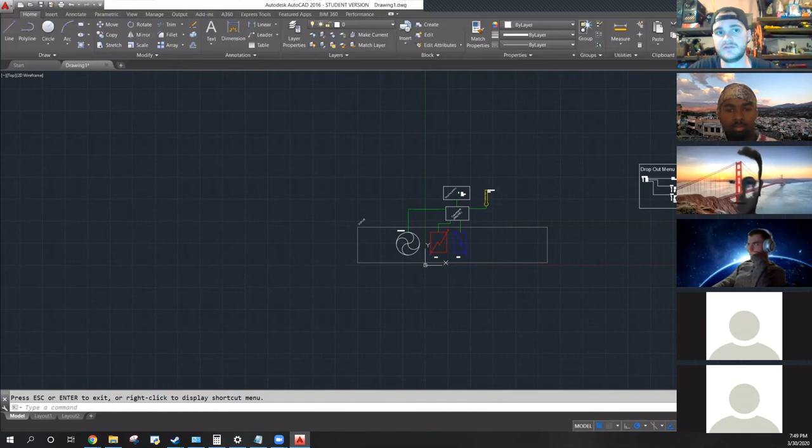So I think what I'm going to do next week is, hopefully I'll have a camera I can pan down so I can draw stuff, and I'll rehash that lecture I did on electrical schematics and basic circuitry, because then we can start drawing that stuff in AutoCAD, and from there it's a natural progression into PLC configuration. So next week we'll probably do two 1-hour sessions. The first will be going over circuits, and the second will be drawing in AutoCAD. If you guys have specific areas you're interested in as far as what we'll be drawing, let me know, because I want to cater this to your desires. I'm happy to stick to PLC architecture since that's what I know well, but I'm happy to branch out as much as you guys want.

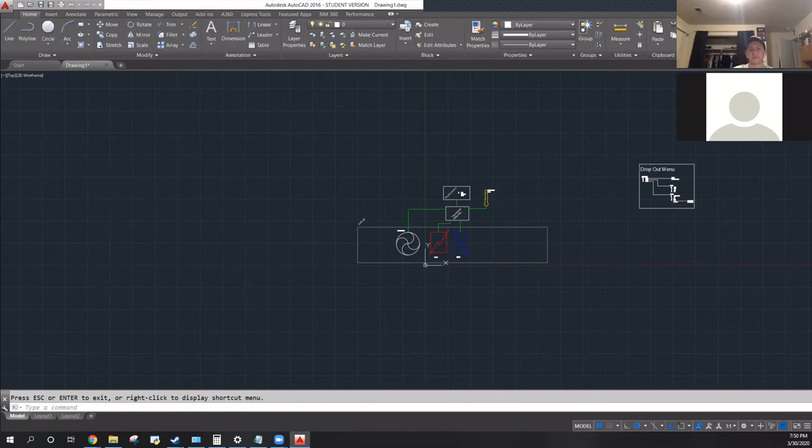And I like your dog, Samaj, that's very nice. Also Sam, did you purposely flip upside down, or did your camera just do that? No, I did that. I'm glad to know you're not spiraling out of control. I flew to Australia while we were doing this. I thought it was just toilet spinning backwards, I didn't know they actually hung upside down. Literally on the other side of the planet. Where'd you get that travel pass? The black market.

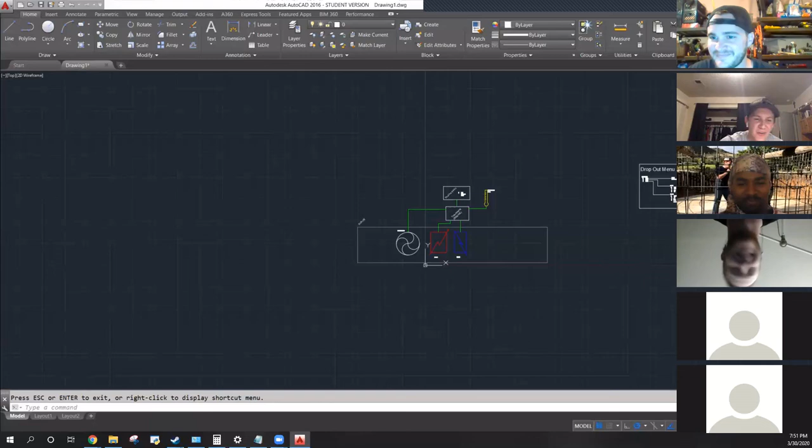Dude, this is gonna, I don't know, it's such a bummer that our last quarter we're just gonna finish up online and probably not go back on campus again. It's gonna be anticlimactic.

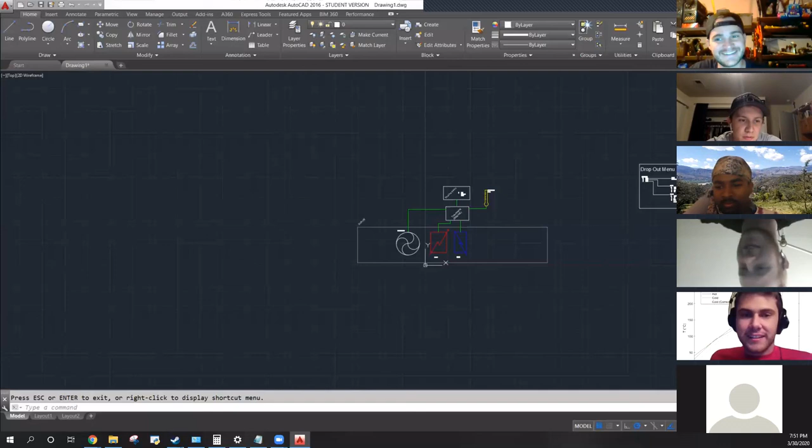Who is that? No one wants to speak. We're gonna do graduations through Zoom? Are you serious, Evan, or are you making a joke? There's Zoom, I mean we should definitely have a Zoom party. I agree, this is super cool. Yeah, it's pretty neat, it works pretty well, so it makes me happy.

And it's got a cool sky in the background. Yeah, I'm gonna have to play with my background, my empire of dirt is not that impressive. Could you make that an extra credit assignment, whoever has the best background graduates? Yeah, we'll definitely do that, we'll take a vote at the end of the quarter on who has the best background. It's going to be a key aspect of this course, as a matter of fact it may determine whether you pass or not. Morale is important. Oh, I know what my background's going to be.

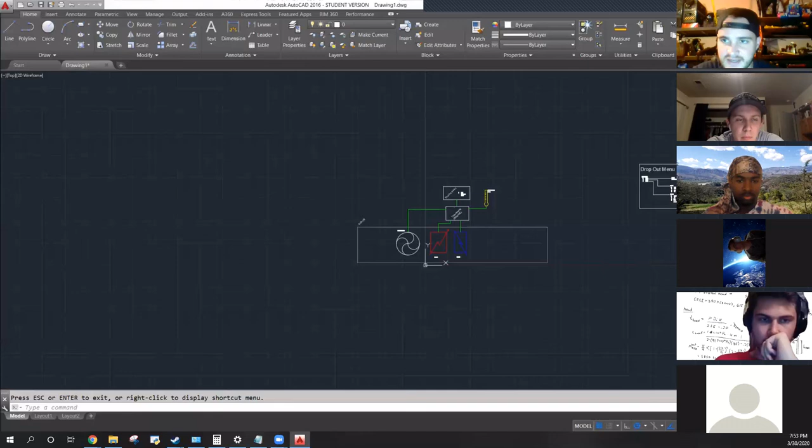By the way, let me know if you have any reservations or issues with the required coursework. We kind of want to see a balance between having assignments to encourage participation and get the creative juices flowing, versus not wanting to add a bunch of crap you don't want to do. But I think also if we don't assign things to draw, it's easy to not actually put in the work to draw stuff on your own. It would be amazing if everybody just went out and spent hours drawing on their own without me telling them what to do, but that's really the only purpose of those assignments, to get you guys engaged, which is how school is supposed to work in general. Anyway, let me know if you have any feedback on that.

I was gonna say, you kind of blew through the isometric 3D modeling thing, but I can see how it's very useful. Can you go over that in detail next week? Yeah, perchance? Yeah, and we can look at that a little bit more now if you want.

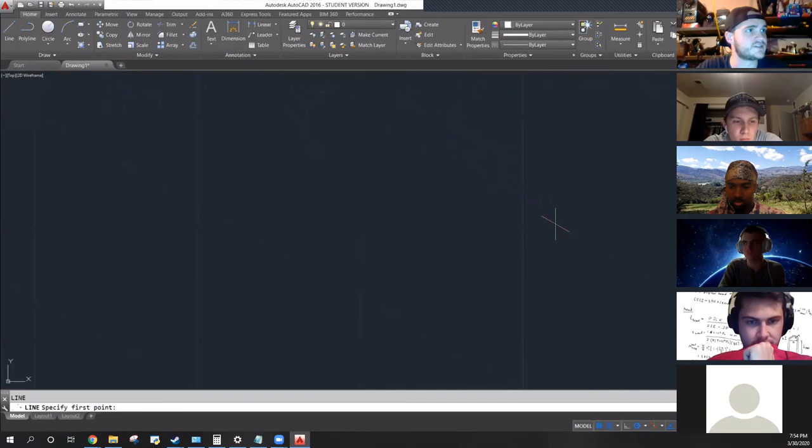Sure, so it's isometric - that button there makes everything look all space-agey. This is one of those instances where it's actually super useful to have snap to grid on. So isometric is basically 2D made to look 3D, if that makes sense.

It's drawing in perspective. I think one of the old Sega Streets of Rage games is actually isometric - it's a side scroller, but you can move up and down too, super badass. You guys probably never played that. Anyway, I think Fallout 1 was isometric. I never played it, but I think so, it's pretty cool. I gotta go back and check that out - I love 3 and Vegas.

So in isometric, you can see there's a drop down with left, right, and top, and we're in the left plane. If we're trying to draw a box, just go line, and because you're snapped to the grid this should make it pretty easy. Okay, so that's there, and then I go to top, and it changes the grid. Then again, just line, draw the top side, then if you change it again - there's an F key that cycles through, but it's not popping up which one. Anyway, I can just draw that side, and bam, now I have a box.

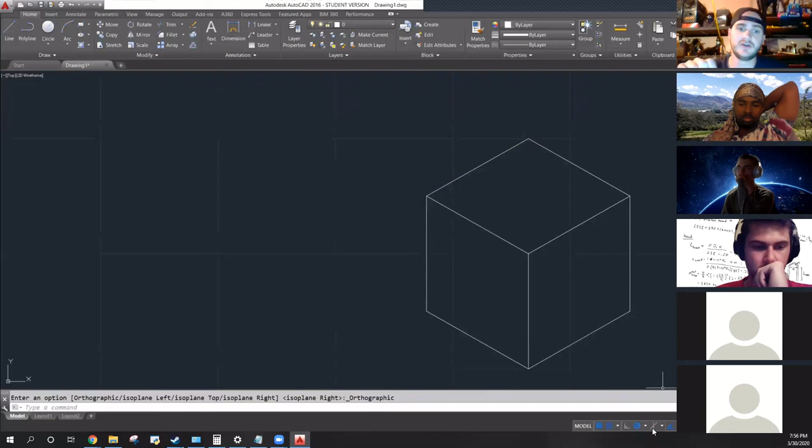This is useful - where I've seen this done is for instrumentation installation drawings, that's the one place I've really encountered this myself. Basically they use it to show perspective for the installation lines, like it would go here, here, and around here. Let me redo this - say this is an actual physical box in the field. You could show that you want your wire to come in right here, then go down, then go under the box, then change your perspective plane, and go from there around the box, then up past the box, then change the perspective plane again, and go over the box.

So now you basically know as much as I do about isometric. It's literally just changing the grid plane behind what you're drawing, so you can snap to it as a reference. It just makes it easier to draw things in perspective. I'm sure there's all kinds of crazy complicated stuff you can do with this, but that's pretty much the extent of it - that's all I've ever done. Does that make sense?